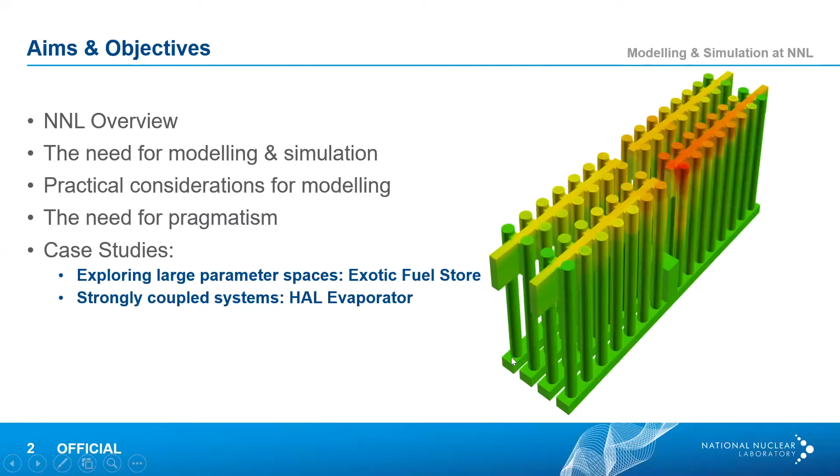Right, okay. So NNL, we sit between industry and academia, and our main goal is to take the R&D that's been done at universities, nuclearise it, and then deploy it within the UK nuclear sector. Essentially, we work like a scientific consultancy, so commercial customers will come to us with a particular challenge, and then we undertake the research, development, and all the background science that is required to then deliver a solution to that particular challenge.

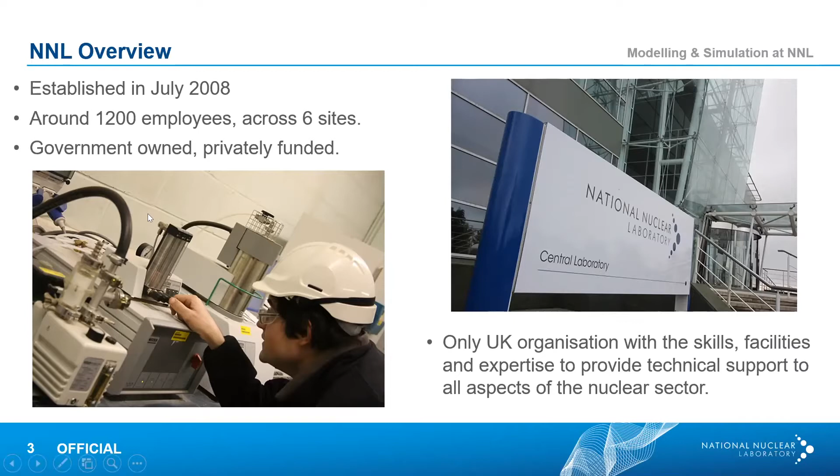So my particular area is computational fluid dynamics. I'm based in our Warrington office over in Chadwick House. That's one of our facilities where everything's desk-based. We also have a couple of experimental facilities, one in Workington, one up in Sellafield, and they're able to do lots of large industrial scale experiments, which include radioactive hot cells as well as non-active facilities in Workington.

So as I mentioned, my background's in thermal fluids, and this is quite a special area in the nuclear sector. This is largely due to the kind of materials that we deal with in heavy plants which process them. There is a requirement for us to process, store, and safeguard nuclear materials. They're hazardous. Because of this, we have developed over the decades large industrial facilities for carrying out various activities on these nuclear materials. Because of the nature of the materials, you can't always go in and have a look inside. It's almost impossible to sample or to make direct measurements. And so this is where we tend to use modeling and simulation to provide some insight.

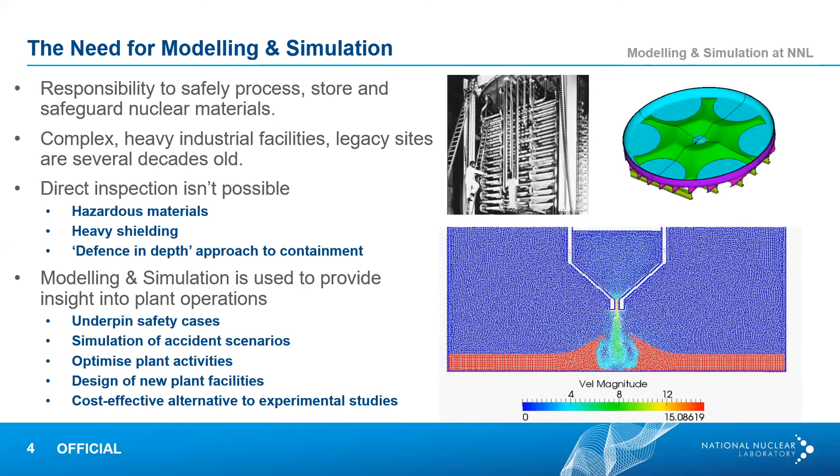So I thought it might be useful to briefly cover some of the tools that we use. Being a commercial organization, we tend to use industry standard codes and pieces of software. In my particular team, we do computational fluid dynamics and thermal modeling. Our core tools would be the ANSYS suite of packages. Recently, we started using Star CCM because it's particularly good in terms of multi-phase.

In terms of our analysis, we deal with very large amounts of data. This could be measurements from plants to anything such as a weather report or experimental data captured off one of our rigs. So we've also developed a suite of analysis tools in Python, R, and MATLAB, amongst the main ones. We also develop some bespoke capabilities in the commercial modeling software. If we find that the commercial tools don't work out of the box, we have quite an active development team who can build new functionality into these commercial packages.

Probably of interest as well is our computational resource. So until now, we've been working on a legacy HPC system, which I believe was commercial grade hardware and consisted of around 1,000 cores. So this is coming towards the end of its life now, and we're planning a new hybrid system, which will be a mixture of on-premise HPC as well as cloud-based resource.

Obviously, working in the nuclear sector, we have certain security restrictions. And so this system allows us to maintain the security that we need, have an accredited system that ONR are happy with, but also where projects are perhaps less sensitive, we can farm that work out into the cloud and allow that compute resource to grow and shrink as required.

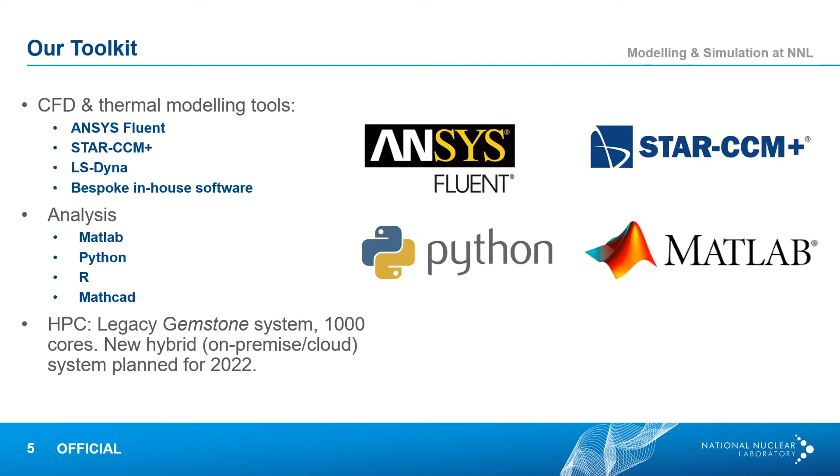So there are some practical considerations for the type of modelling that we do, and I thought it would be useful to really cover these because this is where the potential benefits for these big exascale systems really come to the fore. One of the main ones for the type of work that we undertake is uncertainty, and a lot of this is to do with the history of the nuclear sector.

So we may have a process liquor, say, which changes through time due to chemical reaction or radiation damage or some corrosion of something else in the vessel. And so there's often a bit of uncertainty that goes into the model. This is something we tend not to explore because when you start mapping out the effects of uncertainty, it tends to rely on lots and lots of models, and there's too much computational overhead there.

Another key issue, which I'm going to touch on shortly, is we are very often called upon to resolve very small details in an otherwise very large complex system. And I'm going to show a really good example of this one in just a little while. Another issue that's becoming more and more common is the need to explore quite a large parameter space.

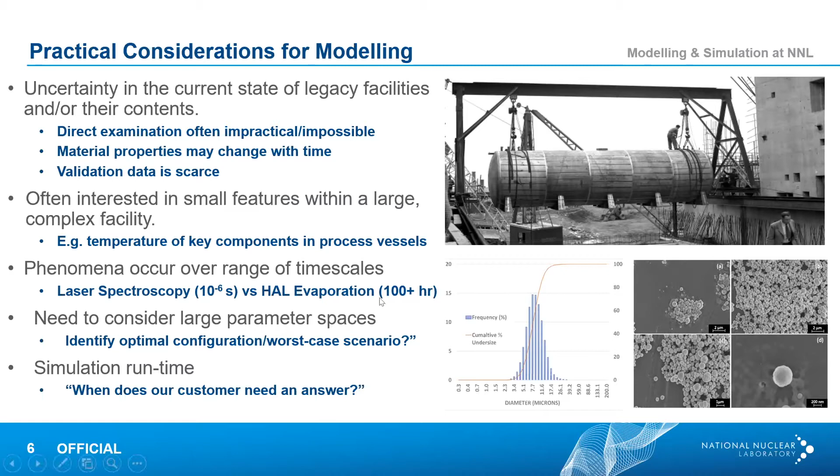So as I mentioned, over the years, we've come up with a range of pragmatisms that are probably quite familiar to anybody that's worked in an engineering field. However, it's probably useful going over these because they are areas where we could potentially alleviate some of these challenges using larger scale computing. As I mentioned earlier, uncertainty is a real problem for us.

So we often aren't entirely sure what's in some of these vessels in terms of the properties. And obviously, if you're trying to predict something like a temperature, that information is really important. So what we would tend to do is have a bit of a survey before we start a job, and we try and assess the materials and the data that we're dealing with. And we tend to introduce a very large degree of pessimism.

So a good example of this is if we're modeling, say, a fuel store. Radioactive fuel generates heat, and often we know that a particular package may contain, say, between 1 and 10 watts of energy. So the basis of the modeling is we'd assume that all heat packages within a particular facility have 10 watts of energy.

That then overpredicts the temperature, but it builds in a bit of a safety margin. It means that any simulations we do are going to provide safety because we're overpredicting temperatures, and then the system can be designed to accommodate those.

That, however, comes at the cost of over-engineering some systems, and in some cases it might actually stop plant activities which are safe, but because of the degree of pessimism that's been built into the model, activities have to stop, and we then need to review the work.

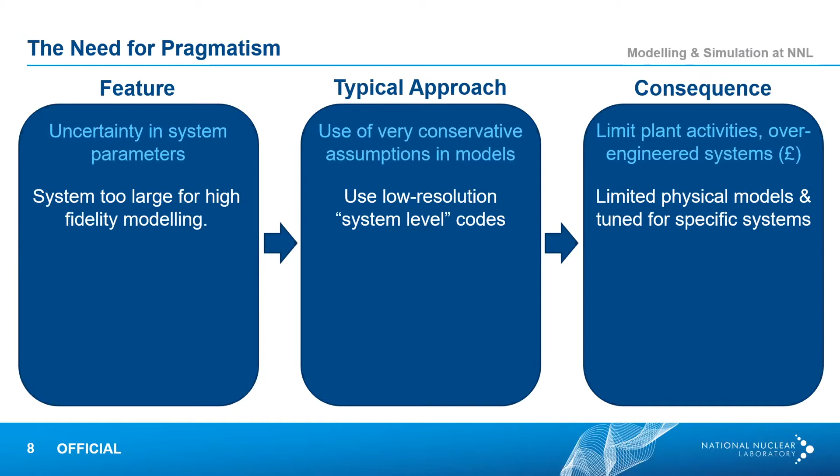The obvious disadvantage there is that these techniques tend to be based on engineering level calculations or correlations. So they're a step above hand calculations, but you do lose a lot of the detail that may be important. Also, the models themselves can become invalid as you start moving away from the system for which the correlation was derived.

Another one that's really key, and it's becoming more important for NNL, is the high degree of coupling. We've recently started moving into reactor thermohydraulics, and for say a water-based reactor, the interaction between the water and the neutrons coming out of the fuel rods is very important. There's feedback: the water acts as a moderator, its ability to moderate depends on temperature, and so there's this coupling between the neutrons being released and the water moderator.

To tackle these problems, we might link, say, a lumped parameter code with something like CFD. That's good, it gives you a broad feel for the system, but again, it's a way of missing out some details which might be important, especially if you're trying to optimize something.

And finally, the delivery with which we have to satisfy our customers. The delivery timescales are often influenced by what's happening on plant, and there's not much wiggle room in those. Nuclear projects are, by their very nature, very complicated, and so delays in one engineering process can have significant downstream effects, and so we really have to make sure that we can deliver our results to customers in a timescale that's useful for them.

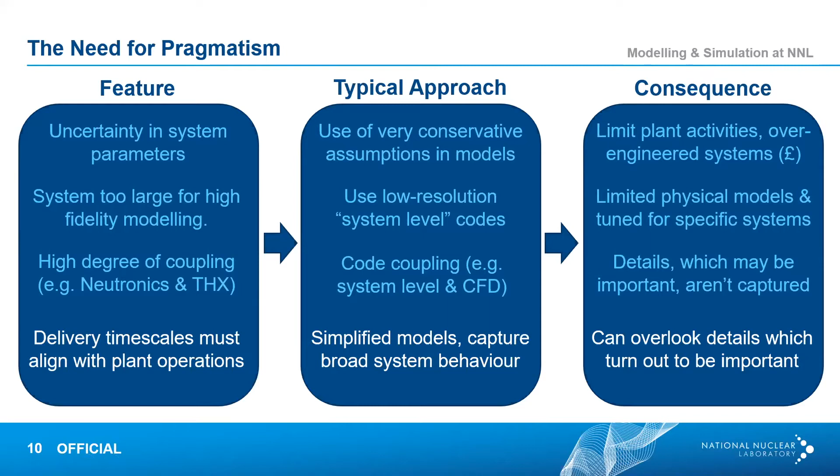So this naturally means if those timescales are tight, we do have to simplify models where possible. This is an area where we need a lot of engineering judgment, but it allows us to deliver things in a timely manner. The challenge being that oversimplifying the problem means we can miss something. Now, these are all areas that are largely governed by the lack of computational resources, so any improvement and anything approaching exascale would really help us out.

So the first case study I'm going to talk about is an exotic fuel store, and by exotic, it means it's a non-standard fuel. This is radioactive material like pellets or little plates or fuel pins, which haven't been in a reactor, but they have been used for experiments up in Dounreay, and they are quite radioactive. As a result, they generate heat.

What you can see on the right-hand side here is a large concrete vessel, and these cylinders that you can see here are ports. This is the airspace, and the outer wall is the concrete shell. For the flow path, we have a green inlet, and the flow goes in this. This is an actively cooled system, and each one of these ports with these cylindrical columns is a hollow airspace which will occupy a very large fuel container.

The fuel container is a cylinder, about 3.5 meters tall and I think about 40 centimeters wide, and that contains this active material. The purpose of this store was originally for something else, and this is a good example of the type of work we often pick up: this facility is now being retasked to store these exotic fuels. It's not what it was originally designed for. So the fuel sits in each one of these columns, and what we have is an active ventilation system.

So air gets pushed in through the green entrance, it then passes along those yellow channels along the base, and it exits through the red squares at the front. So obviously, as the ventilation pushes air past the fuel, it extracts some of the heat and keeps everything nice and cool.

So the query here from the customer is, what's the worst possible loading scenario for this? We tackle these problems quite a lot. Worst case scenarios, obviously something you don't want generally, but from a modeling perspective, it's what we're aiming for, because the philosophy here is if we can simulate the worst possible scenario and this facility is safe, then any conceivable configuration we're likely to find in this facility will also be safe.

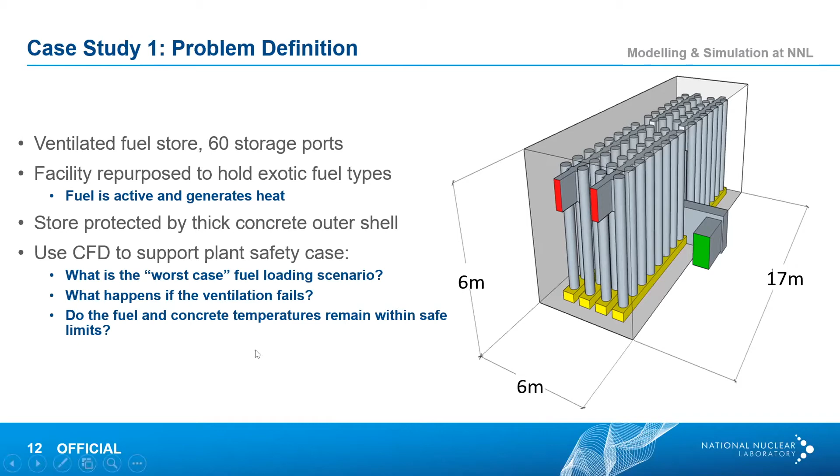So it's a fairly straightforward problem in terms of the physics. It can be solved just with off-the-shelf CFD software. What we have is fuel, which obviously gets hot. So this is just a cut through one of those columns I showed you. Heat transfer processes are all well understood, but the challenge here is that if you recall the original diagram I showed you, all those cylindrical ports are coupled. There's air gaps between adjacent ports, and so you can conceivably have the flow in one port affecting its neighbours and even having a long-term effect on ports that are quite distant.

So there's two kind of interactions here that are important. The buoyancy force, which is coming from the heat that's generated by the fuel, that obviously warms the air and generates buoyancy. So if you have a non-uniform distribution of heat load, then that'll give you a non-uniform distribution of buoyancy. And so the interaction of your vent with the buoyancy forces is strongly dependent upon where you place fuel within that assembly. So that's all very well and good.

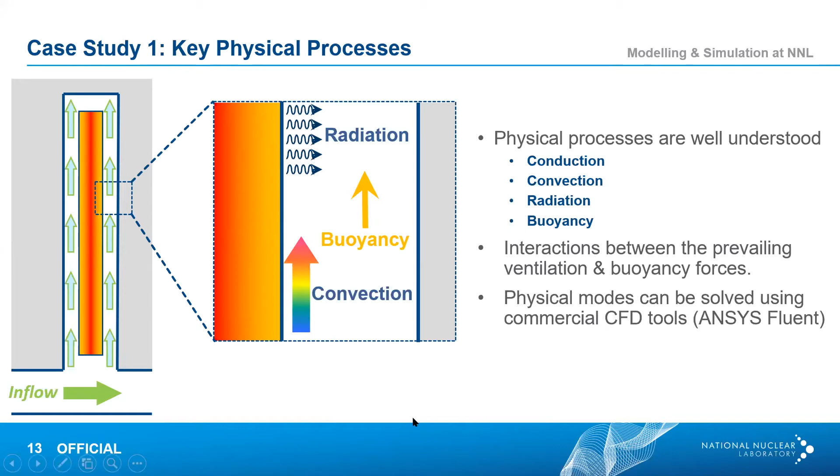We can tackle this problem using commercial software. However, there are thousands of possible configurations, and this is made worse because we have 60 ports, but we also have 7 different types of fuel. And the fuel varies. This is a typical cross section. So the fuel comes in these cans, and the cans themselves are literally like a can of beans, like a small metal can, and it contains radioactive material that's heat generating.

So these are then stored in a multi-layered system. The one that we can see here, there's an aluminium inner liner and a stainless steel outer liner, and it's this stainless steel thing that slots into each of those columns. Now, in between those, there's layers of argon, and so the conduction path here is actually quite complicated. So if we really want to account for the heat transfer from this fuel into the outer world, we need some way of accounting for these small details, because they do have a big impact on the global temperatures.

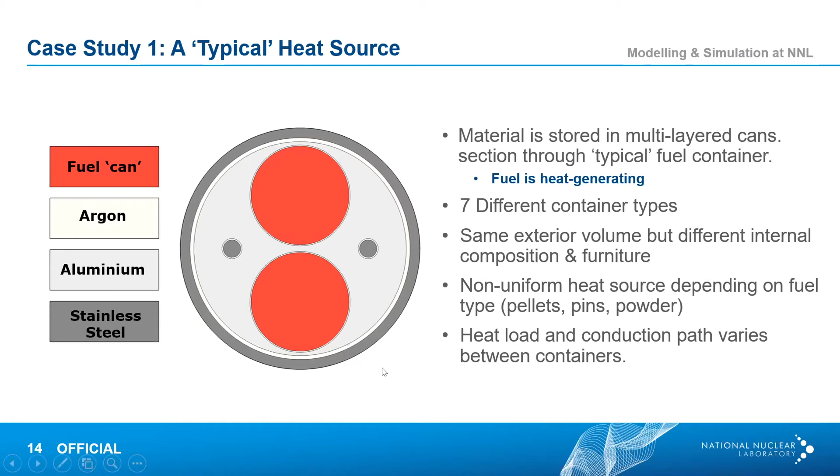It's complicated by the fact there are 7 different types of fuel. So we've got 60 fuel ports, 7 different types of fuel, and that gives rise to hundreds of different combinations. Now, obviously, we can't run each one of those. It's a very large model. Computationally, it's impossible. So we have to refer back to those pragmatisms I mentioned earlier. It's particularly complicated here, and there's no symmetry, so we can't take advantage of that in our models. And obviously, the interaction between your buoyancy and ventilation is quite significant, and it can become quite complex.

So when we're distributing fuel across this, we've got 7 different types of fuel, each generating different amounts of heat. We need to try and work out how to position them here to get the worst possible scenario in terms of temperature. The main computational issues here are, obviously, there are a large number of cases to run. Each case is in and of itself a large simulation. I think even using the majority of our HPC, we were looking at several days of runtime per case. So obviously, if you need to run several hundred, that's just not possible.

And finally, if we're actually looking at a loss of cooling accident where we switch off the ventilation and then the temperatures are purely driven by buoyancy, your transient runs to hours or perhaps days. So again, it's just not achievable.

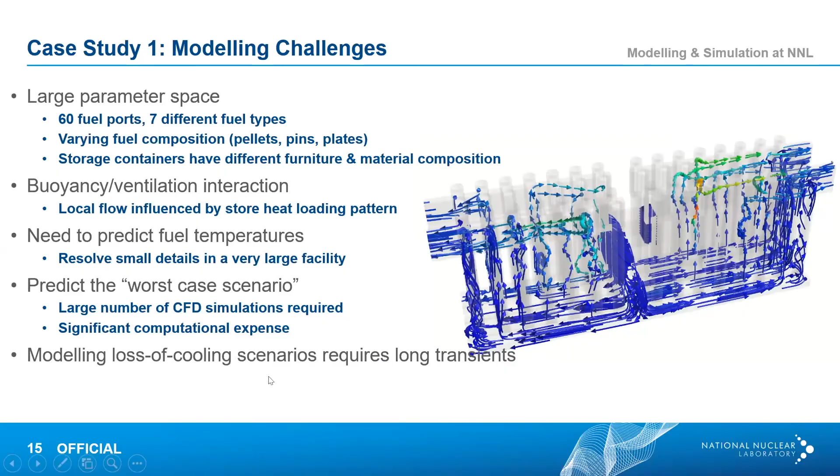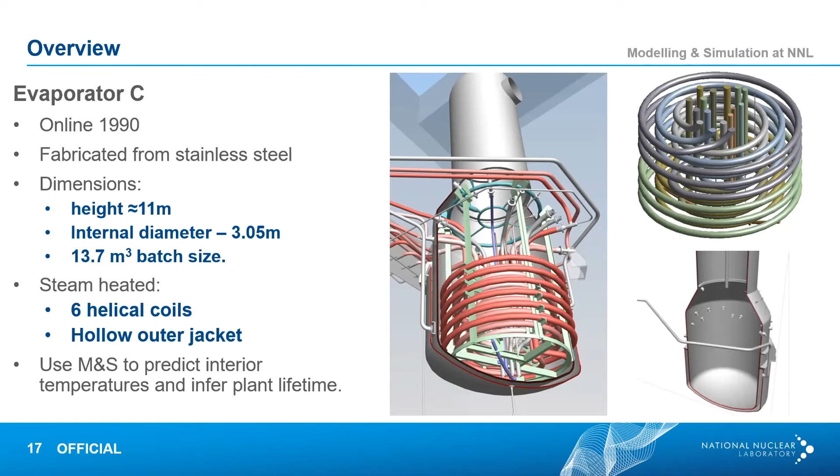The problem becomes a bit worse when you consider the physics as well, because it's a very complex set of physics we have to deal with. So the evaporators are steam heated. There's just a slice through here. What we have is a vessel with a hollow outer wall called the jacket. The liquor goes on the inside, and then we have this void space above. This ullage is maintained at a low, subatmospheric pressure.

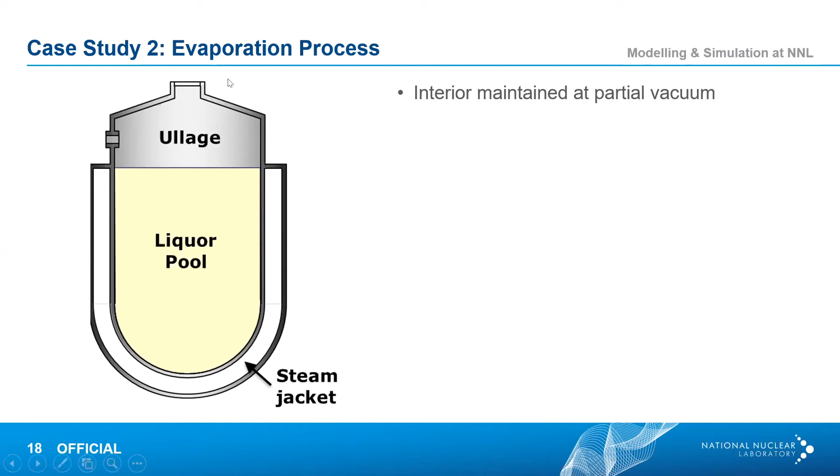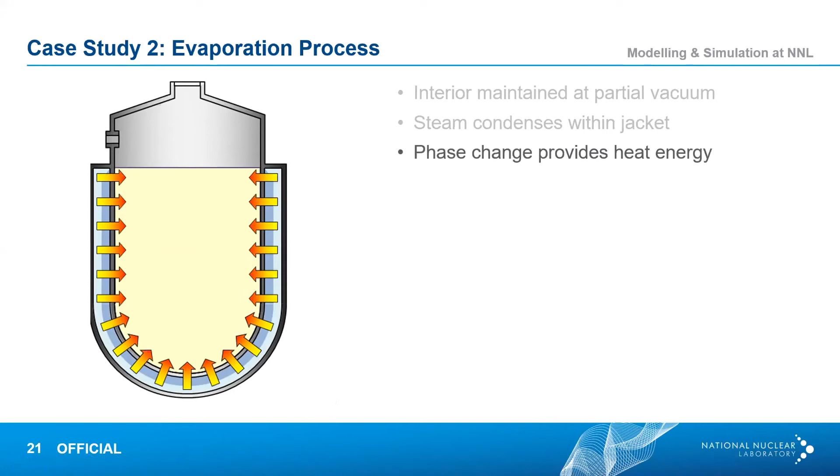The idea is that if there's ever a breach in containment, things are sucked into the vessel and not squirted out. It also suppresses the boiling point of the liquor. So the aim of this vessel is to boil this off, and this is done by flushing steam into this outer hull. The steam then condenses, and that condensation generates a lot of heat. So it's that phase change that powers this. In this case, I've only considered the outer jacket, but the same thing's going on in a series of 6 coils which run through the vessel.

So the heat increases the temperature of the liquor, and eventually the liquor starts to boil. We're able to suppress the boiling point because of the partial vacuum in the ullage. What this does is it reduces the volume of liquor, and it means it's more suitable for long-term storage, much more cost-effective. This is a very long process, though; it lasts for several weeks. So again, the simulation timescales on this are enormous.

But over time, because the concentration of this liquor increases as we continuously add more liquor, the heavy metals start to precipitate out. The gas that gets given off, which is not radioactive, gets taken away and processed as a separate waste stream. And we're condensing down the radioactive materials in here. It then starts to form a sediment which sits on the base of the evaporator, and it leads to a local increase in metal temperatures. This enhances the corrosion, and it's something that we need to predict through modeling.

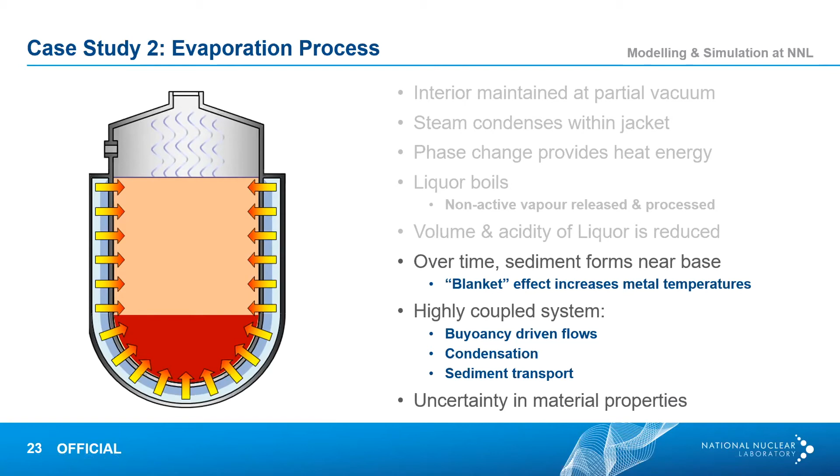So it's one of those cases where it's a very strongly coupled system. This sediment forms almost a thermal blanket. It provides a thermal resistance to stop the flow of heat going into the vessel, so that leads to local temperature increases. There's then the interaction with the flow. The boiling process obviously generates a flow within the vessel, which interacts with all that furniture. So from a modeling perspective, it's very much a nightmare scenario.

So in this case, the challenges are we have multiple flow regimes simultaneously. Some parts of the evaporator are boiling, some parts aren't. Convection rules in some parts, boiling dominates in others in terms of controlling that metal temperature. We have condensation, so part of the process is going from a gas to a liquid. We have boiling, so the liquor is going from a liquid to a gas. We have precipitation, and then the sediment that gets deposited in the vessel as well, combining with the flows and the boiling process.

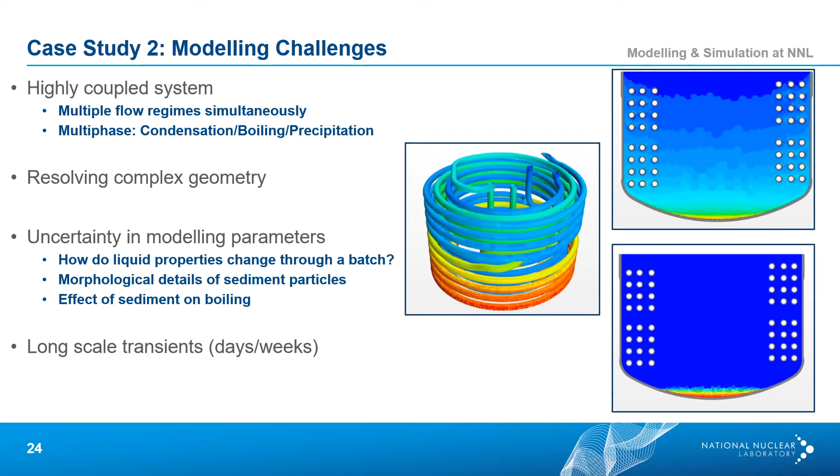Very, very complicated. So the main challenges from a computational point of view are resolving this very complex geometry, trying to capture these incredibly complicated and coupled processes together, and also the long transients, which in this case are days, perhaps even weeks, in this large engineering vessel.

So just to briefly summarize, there's definitely scope for exascale computing enhancing the work of engineering modeling people like myself. It allows us to do more complex simulations more quickly, and that's good. As a scientist, my customer doesn't pay for runtime; they want to pay me to do the science and the investigations necessary to solve their problems. The less time I spend looking at residuals, the better. So from a purely selfish position, it'd be a great thing.

It also allows us to account for uncertainty in some of our models. It's something that we tend not to do as a general rule. We simply don't have the computational capacity to run many models and then generate an understanding of the uncertainty in the system. Also, as part of NNL's remit, we develop new products and new services, and at the moment we're starting to move into the area of machine learning and artificial intelligence. These techniques are incredibly power and data hungry.

So having something like exascale computing at our fingertips would obviously be an enormous help there. And then I think finally, the key thing really is the high fidelity multiphysics. It's going to allow us to take these really complex problems and actually simulate them, where at present it's really not possible to do a full account of them.